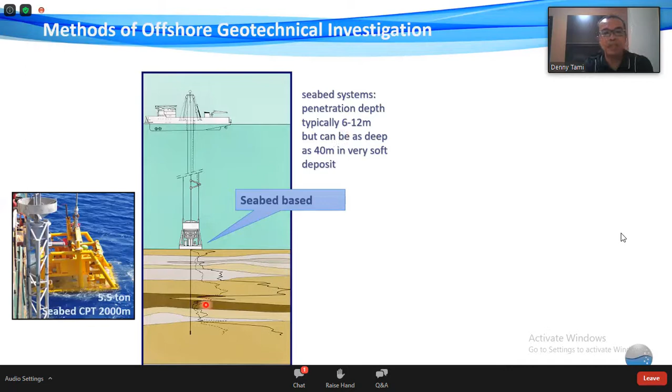This one has a very advantage, because it's quick, we can just deploy it and then run it. But of course, this has a high limitation, typically is a shallow depth that can be penetrated.

And then if you want to go more deep, or there is a hard layer, the second method we call the downhole method, where the equipment, the rig, the drilling, is performed from the vessel. But in this case we need a seabed frame to hold the pipe, and the derrick here needs to be flexible, can move.

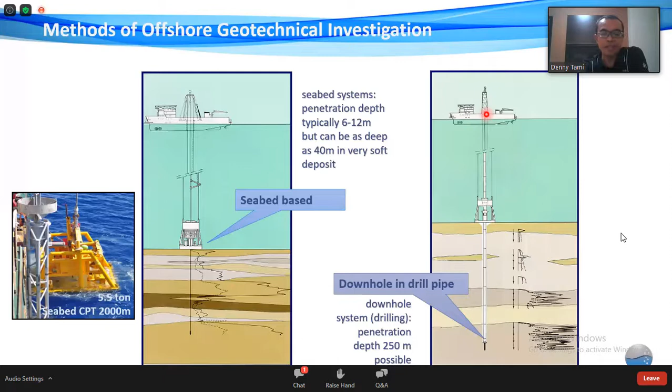This is a sample of this. The derrick is basically the same as the derrick on the rig, but in mini size.

Because for the geotech operation, we need only 150 to 200 meters, maximum 250. We don't need as big as a rig that can go all the way to 4,000 or 5,000 meters below the seabed. It's a mini derrick of the rig, and this is a top drive.

And then this is the seabed frame that I mentioned just now, used to hold the pipe. And then the other thing we need for the geotech vessel is, of course, a motion compensator. Here, unlike in the rig, the platform is stationary.

The platform is not moved up and down, but the vessel, it depends on the water tide, wave or current, so the vessel can be moved up and down. That's why we need this compensator. So basically, when the vessel moves up, the drill part doesn't also move, it's not pulled. So it's held steadily.

This is just a nice view. This is all the equipment that we have here. And then this is another vessel, we have a bigger rig here, but also the same arrangement here.

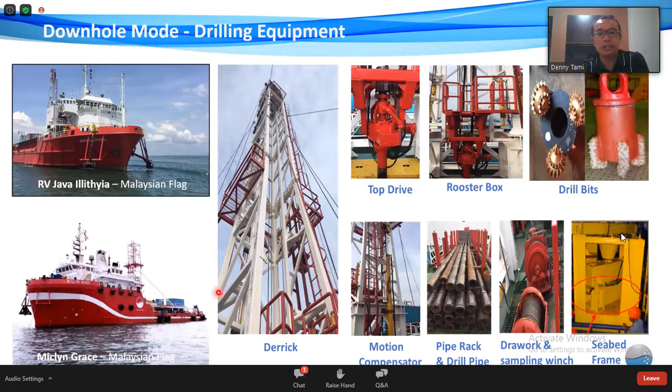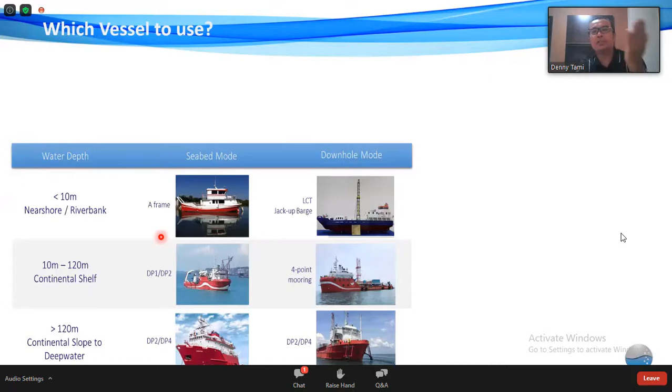Okay, in addition to this, we continue. Just now we talked about how we get the sample. Now, which vessel is to be used? There are many types of vessels, from small to big, and it really depends on the water depth where we are going to take the sample.

For the near shore or for the shallow river bank, we can use an LCT, because it's flat, so it can have a very shallow draft, so it can go to this kind of area.

But when you go deeper, say more than 10 to 120 meters, we have to go to a mooring vessel, because we need stability. Here we need a deep, big draft, at least 4 to 5 meters. If we use the LCT, we can have issues especially when you go to deeper water, more than 20 meters.

And then if we go to more than 120 meters, we need to go to DP mode. DP mode means dynamic positioning. So the vessel has navigation connected to the satellite, and it locks the location. When the vessel moves, the engine will adjust the location so it doesn't move anywhere.

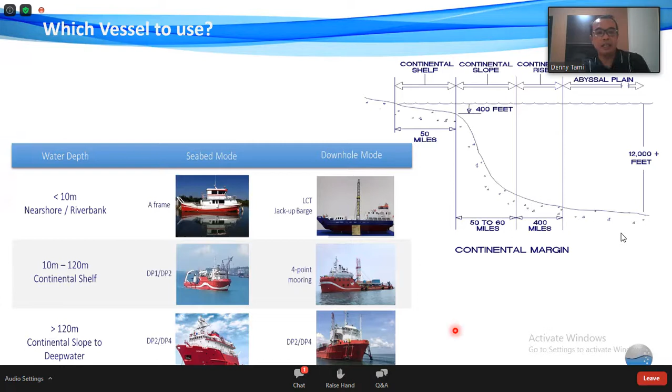For mooring, we switch off the engine, and the vessel position is held by the anchors, 4 or 5 anchors, at least 4. Some vessels have 5 anchors. So that's the difference between these three. And for the seabed mode, we can use this kind of small vessel basically.

Also on the vessel, we need to have an onboard laboratory. Why do we have this? Because unlike when we do soil investigation on land, when we don't have enough data, we can come back tomorrow or come back next week.

But offshore, the mobilization is the main cost of these campaigns, so we need to ensure the data we collect is correct and adequate, and of course meets the quality. We extrude the sample on board and do the test, starting from classification, then strength, also the UU triaxial tests, and then the sample is stored and brought to a land lab or onshore lab for further testing.

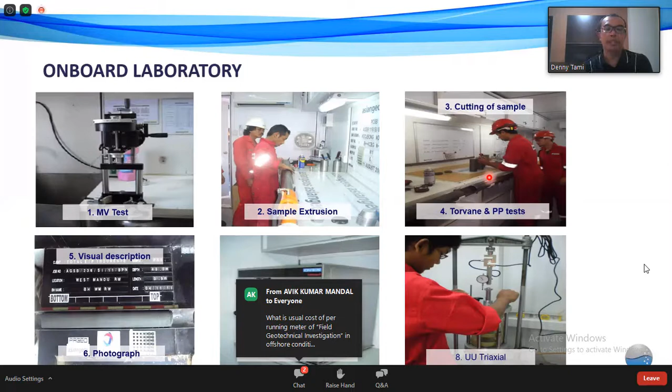Some tests cannot be done offshore, basically because the vessel keeps moving, like consolidation, which we definitely cannot do, or other tests that take longer. So we send them to the onshore lab. But we need to ensure that before we move from location, the data is good and the data is enough.

The result of the offshore geotechnical investigation is what we call a boring log here. This is one of the samples we have for the jack-up rig. A typical borehole plan is, for each leg, we have at least one sample or one CPT.

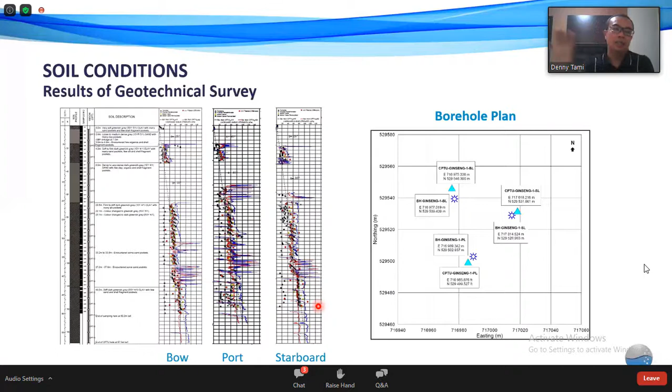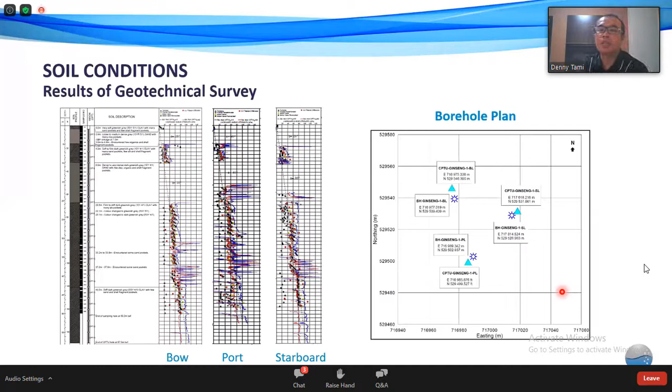For the high-risk location where we have a possible punch-through, it is recommended to have one borehole for each leg. Or in a simple, well-known area like the Java Sea, North, we can have one sample at the center and one CPT. But this is the most common. I mean, the cost of one CPT is not much compared to the cost of mobilization, right?

Once we know the soil data, then we can do the geotechnical engineering. In this case, we focus on leg penetration analysis to see, when we bring rigs there and the rig is in place, whether it is safe enough. Of course, this one is for the approval of the location.

If it is too risky and the insurance company is not willing to cover it, then we need to do a kind of site-specific assessment, or adjust the preload procedure, which our friends from MWS normally do.

Okay, a little bit on the jack-up rig. A jack-up rig has three independent legs. At the bottom it has a spudcan, which is basically a simple footing, but it is huge, can be 15 to 20 meters wide, and each is independent. These are the parameters we need for our analysis: starting from the area, then of course the volume as well, and then the intended load.

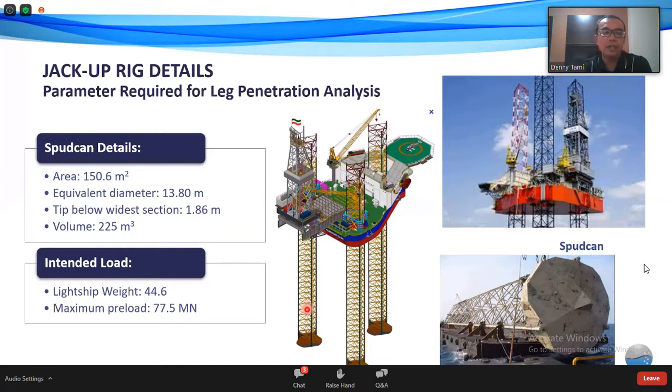The intended load here is of two types. One we call lightship, which is basically the weight of the rig without preload, and then the intended preload. Maybe you see it in the next slide here.

This is the jack-up rig installation. First, after we bring the rig to the site after towing, we can see the rig, the hull, is still floating. Then we lower down the legs, which we call soft pinning. After that, we lift the hull, not much, half a meter to 1 meter only. When we lift it, all the weight is transferred to the legs.

The legs penetrate further here. Just now was the soft pin here, then we move to A from this one. After that, we do the preloading. This one is based on the self-weight of the rig. How we normally do the preloading is we put water into the ballast of the rig, and we preload until this point.

Until we ensure that the rig is stable enough, and then we unload, remove the preload, move to here, and after that the platform can be raised to the intended safe operation height. If there is a platform nearby, this one must be higher than the platform. It also depends on the platform.

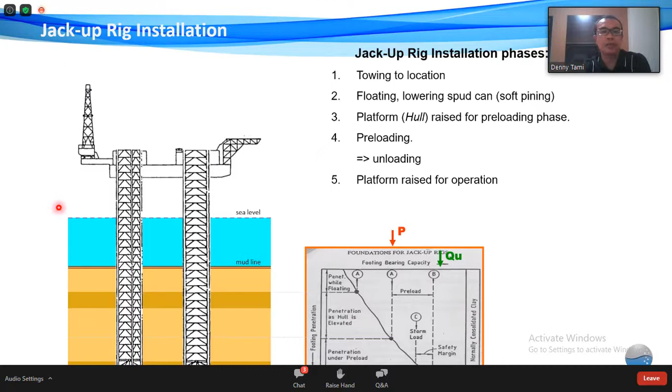Right, and you can see there is a gap between the maximum preload and the load during drilling. This is the maximum preload, and this is the load during operation. This one we call the safety margin. We know that this foundation is stable enough because we already loaded it up to this point, point B. This is the one I mentioned just now, the maximum preload.

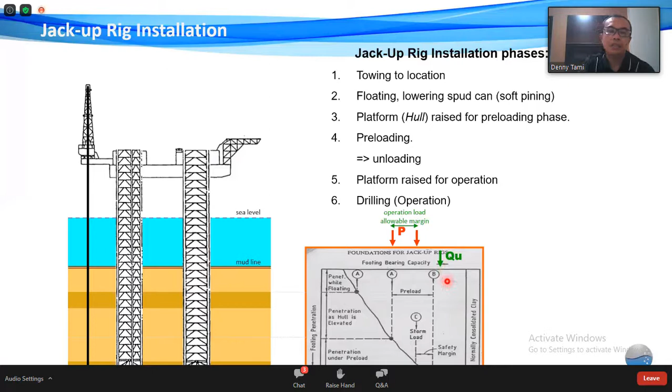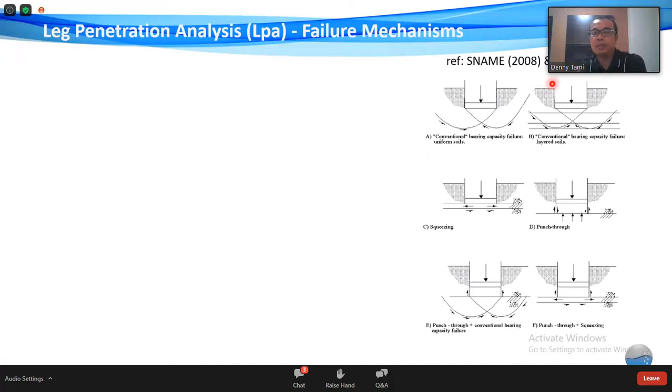Knowing the soil parameter, knowing the rig parameter, and then you can do the analysis together. Now, in the jackup industry, normally we refer to the SNAME and ISO here. There are different types of failure mechanism here. Basically the footing is the same as a shallow foundation.

But the difference is when we design a shallow foundation, we design at limit equilibrium. We calculate the ultimate capacity. After that, we divide by the safety factor, maybe half or 1/3, safety factor 2 or 3, and then we only load the foundation to 1/3 of the capacity. Basically, it's just stable here. But for the rig, we load it all the way to fail.

So in this case, when the jackup rig penetrates, we fail the soil, we push the soil down until it reaches maximum capacity, until the ultimate capacity of the soil is higher than the maximum preload. So in this case, we always work on the ultimate capacity. So there will be a difference with the shallow foundation because of that.

For simple uniform soil and layered soil where the strength is not significantly different, we can use the same conventional approach as a shallow foundation footing. But when we have a layered soil, this is what we call the punch-through type of failure mechanism. In this case, we have a stronger layer overlaying a weaker layer. The mode of failure is not governed by this layer anymore, but by the layer below plus the friction along this. So a different mechanism.

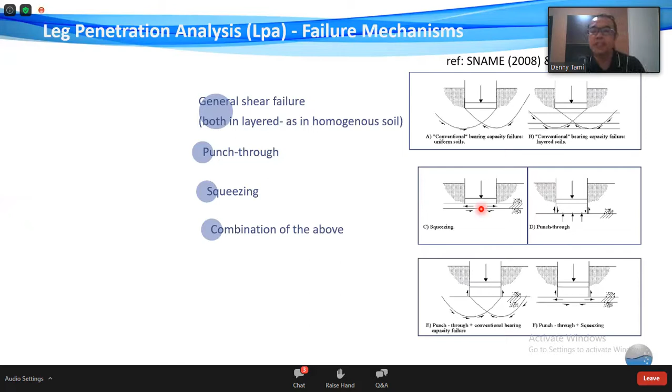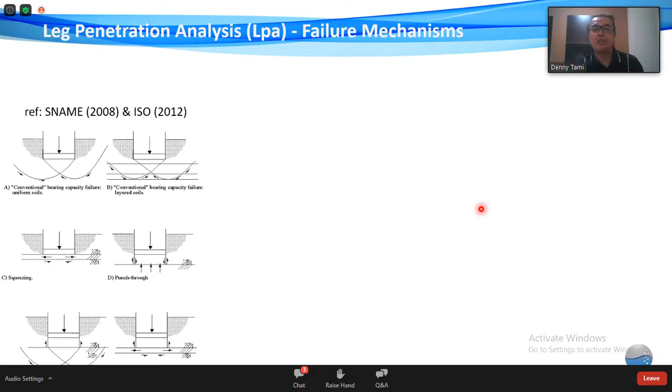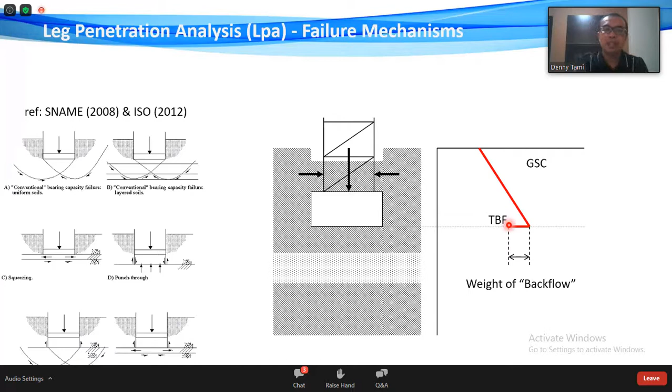And then at this point, the backflow happens. What we mean by backflow is the soil on top of the rig collapses and fills on top of it. Just now it's like this, now it's filled. Because of the additional load of the soil, the strength is reduced. It continues to penetrate, still general shear failure, until it's quite close to the sand layer, where we have squeezing. This layer is just being squeezed out.

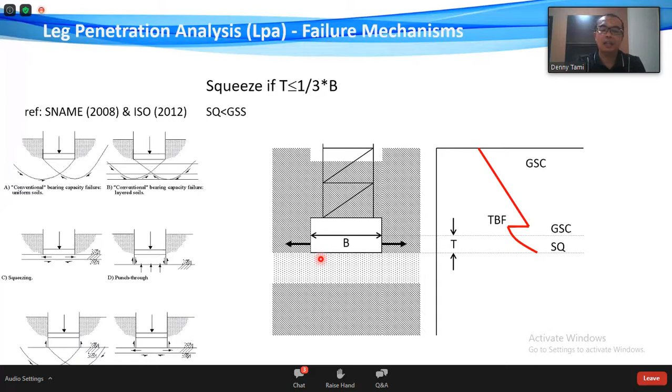Being squeezed. And then now the spudcan sits on the sand layer and continues. Still general shear failure, but on the sand. Just now on the clay, this one is on the sand. Different formula. All of these have different formulas. You can always refer to SNAME and ISO. The formula is there. So we just need to understand the formula we are going to use for different depths or different methods.

We continue with a general shear failure in sand, until the spudcan is quite close to the interface between sand and clay, where the punch-through will happen. The punch-through here is governed not by the sand anymore, but by the underlying clay layer. When punch-through happens, of course, the strength drops. This is what we are afraid of. If this drop is too much, there is what we call uncontrolled rapid leg run, which is something that we avoid.

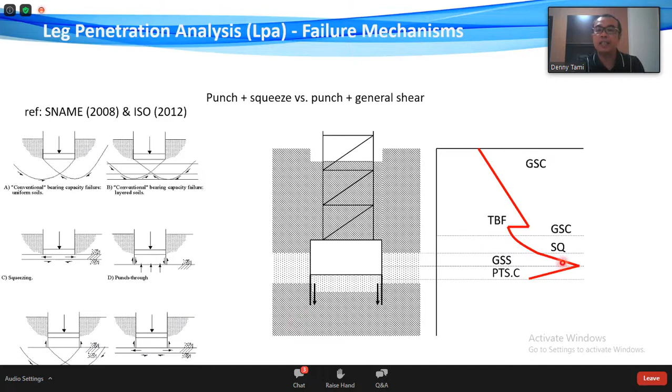And then of course, if this happens at our site, there will be adjustment of how the preload is done for this location. The rig will continue to penetrate until the ultimate capacity at this depth is higher than the preload, and then the rig just stops and stabilizes there. So the punch-through will affect the preload procedure, like I mentioned just now.

The MWS later on will decide this can be preloaded. We need to do 1 cycle, 2 cycles, or 4 cycles. A cycle means loading up to, say, 50% for 1 cycle.

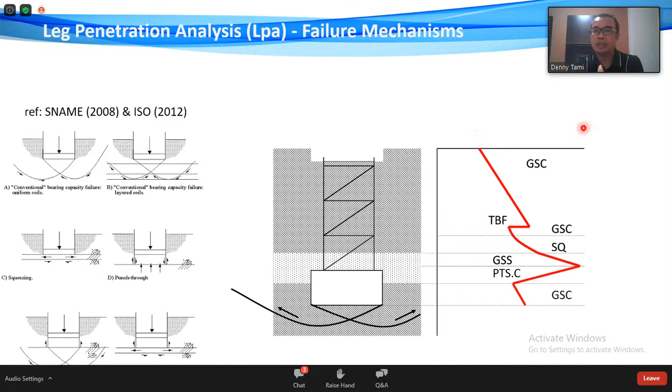50% means from the lightship weight to the maximum. So they load it up to here first. See, they stop it here, and then they wait for another 4 hours, and then unload the preload, and then continue loading again until it is safe enough, rather than just rapid. So of course it will affect the time to do the preload or the rig emplacement.

A straightforward location can be done in 6 to 12 hours, but a very complex location can take days, 3 or 4 days. And then still after 3 or 4 days, we cannot reach the maximum preload. This is a situation that everybody wants to avoid.

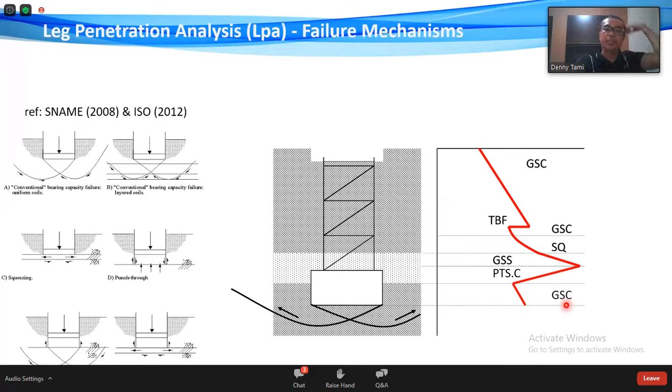Okay, until it penetrates. Okay, why do we worry about the punch through? Of course, the consequence cost is tremendous. It can easily be 1 million to 10 million per failure. This is based on previous records, and then of course the delay and the reputation of the oil company client.

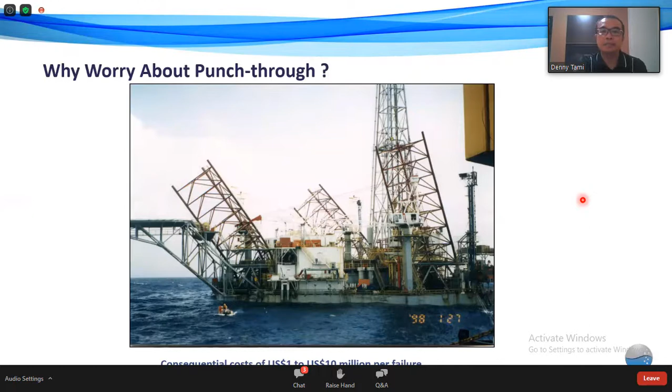Okay, now let's see case by case of the geotech. The first one we have here is the punch through that happened because of the selection of design parameters. What happened here is the design parameter selected for leg penetration analysis followed the design line for the pile. Of course, for the pile we can take a general line, because for the pile what we want to know is the average unit friction of the location.

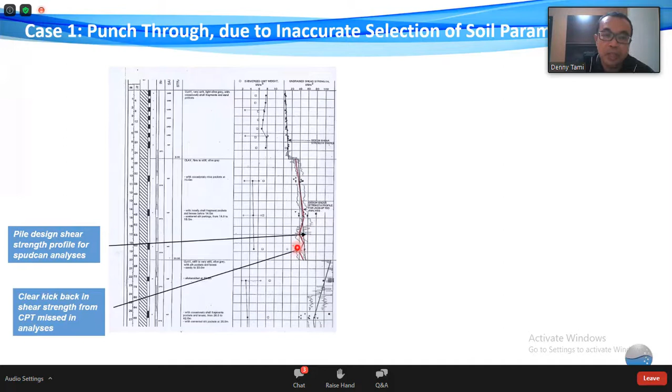When the engineer did the leg penetration analysis using this straight line, the spudcan just steadily stabilized to reach the maximum depth here. But we see that there is an up and down strength here, especially shown by the CPT data, and we need to consider it, because this is an actual case. What happened is the rig just followed this strength. So it's not stabilized. At maximum preload the punch through occurred here, and then the leg ran.

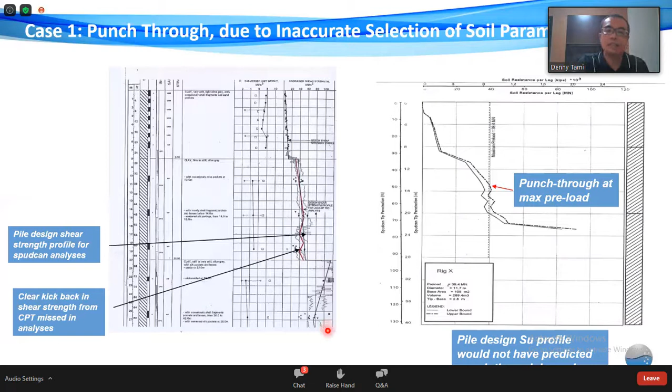In this location, what we learn is, as much as we want to simplify the data, because as an engineer it's not good to have a layer every meter, failing to see or understand the detail of the strength can be fatal and catastrophic, leading to punch through failure.

Sometimes it cannot be done because the well slot is full here, so the rig needs to be shifted to get the targeted well, or the rig is not the same as the previous one, because the contract was won by another rig. So there will be a difference, and the new spudcan cannot go into the footprint.

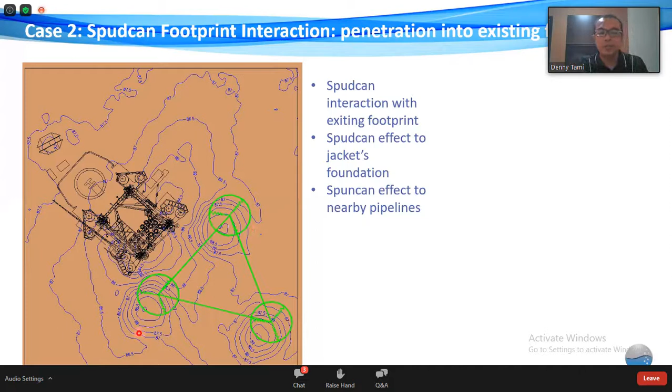So what happens here is, if half of the spudcan stays on the virgin soil, which is stronger, and half goes into the footprint, which is basically a hole created by previous emplacement and filled by mud or new deposit, much softer than the existing soil, the leg can easily slip into the crater. When that happens, it can easily damage the leg of the rig.

In addition to this footprint, normally when we revisit the platform, we also have nearby structures that we need to consider, because the spudcan can be 15 or 20 meters wide, and as you penetrate below, if it is too close, any movement on the clamp on the pipeline can crack the pipeline. This needs to be considered also.

Also for the pile foundation of the platform, because the spudcan displaces a huge amount of soil, there will be additional lateral bending on the platform, which we need to consider as well.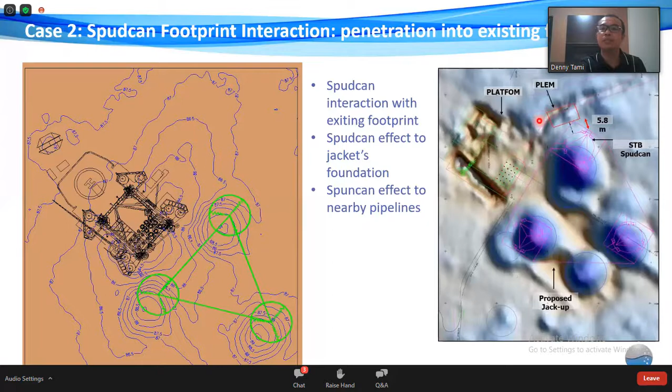Okay. One thing that we need to do, unlike the previous one: the normal leg penetration analysis basically is 1D, because the load is in one direction, axial only, and the soil within the spudcan can be homogeneous. So we can do it using a one-dimensional approach, vertical only. But in this case, when we have a crater, a footprint nearby, and other structures, it's not 1D anymore, it's 3D, and we have to take it with 3D modeling.

There are many, but one of them is Plaxis. But we need to understand that Plaxis and majority of the finite element software have a limitation. Most of this finite element software is a small strain model, while spudcan movement is a large displacement. So there are techniques to modify it, and if this technique is not workable, of course we need to go to the full finite element, or you call it Eulerian, which can model a large strain by adjusting the mesh.

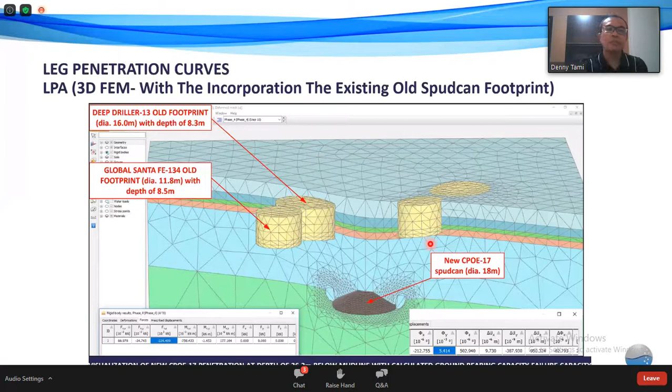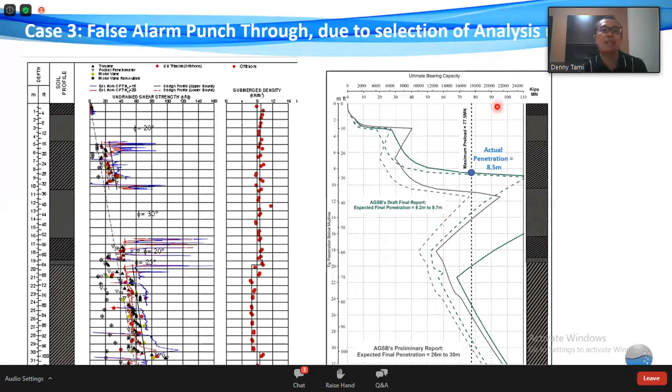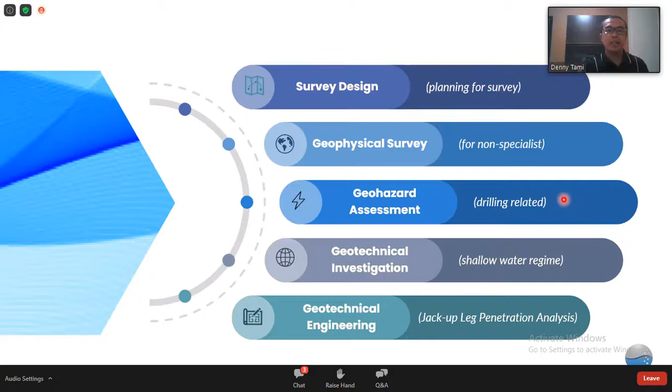I think this is what I want to share with you tonight. We learned about how we do survey, all the way to what is a hazard. To summarize what we have talked about today, first is the survey. For the rig entry site, we need to do a geophysics survey to collect data qualitatively. The scope can be analog and 2D high-res, and the purpose is to get the geohazard map. Using this geohazard map, we check the well location is safe and optimum enough to drill, and after we finalize the location, we bring the geotech vessel.

The geotech purpose is to collect data quantitatively to obtain the soil parameters. We know the soil layering from geophysics, and an indication of type, whether it is granular or cohesive, but what is the strength, we don't know. That's why we need to do the geotech. The scope can be sampling and in situ testing. And when the geohazard map shows that there is shallow gas, we need to do a pilot hole to ensure the absence of the shallow gas.

So the approach is we select the location where there is no gas, but we still need to ensure that there is actually no gas, because when there is gas and we do sampling here, it will endanger our people working on the deck. It can be a burst, the tools can fly, or the gas can create a fire or a poison.

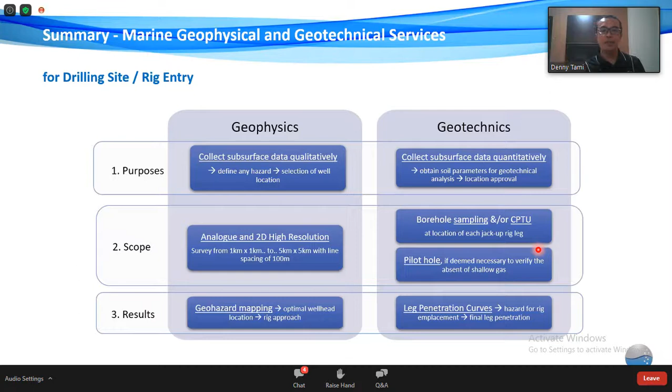And then what we have here is a boring log, and then we do the analysis to get the leg penetration curve. Using the leg penetration curve, the client will bring it to the rig, and then the rig will check, oh, this is a safe location. So basically for the location approval. Okay, here's the first one.

Okay, in general, from the survey and the case studies we presented just now, there are many points that we can see, but I want to highlight four points here. The first is why we need both geophysical and geotechnical. Basically, with geophysical we get the overall picture, but we don't know how strong it is, and then we need geotechnical.

Geotechnical alone is also not safe, because what we collect in geotechnical is a spot location, but surrounding it, whether there is a channel, or is there any coral nearby. So a combination of geophysical and geotechnical needs to be done for the drilling site. And then,

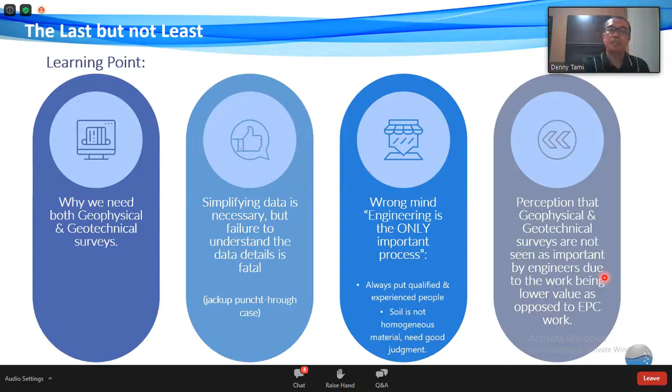And then of course one thing that I want to highlight here is the perception: geophysical and geotechnical surveys are not seen as important by clients or by others because the value is much lower compared to EPC. I think that's all for tonight.

I give the floor back to Dr. Partha. Yeah, thank you, Dr. Denny, for a very illustrative presentation. Probably you can unshare the screen, Denny. Sorry. Can you unshare the screen? Take out the PPT. Stop sharing, yeah.